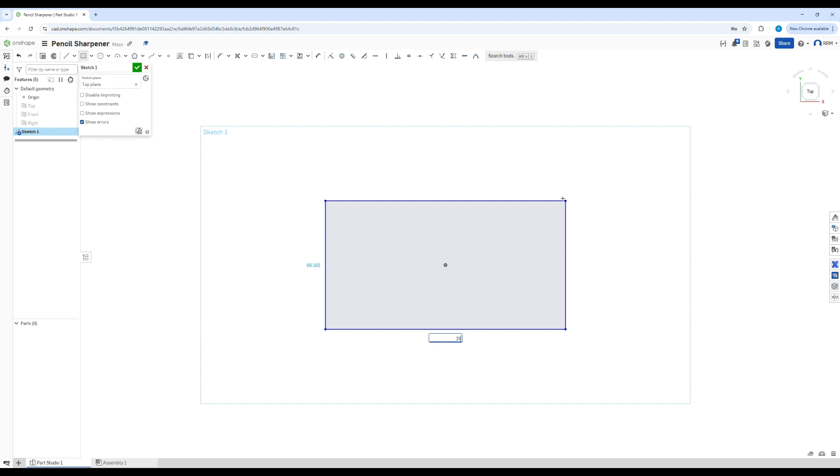So you're probably going to want to start on the top plane. Click for a new sketch, click N to go normal, P to hide the planes, and then you can get a center rectangle. Click and drag out, and we're going to make it 25 by 14, which is the rough size of the sharpener. You can then press Shift E to extrude it.

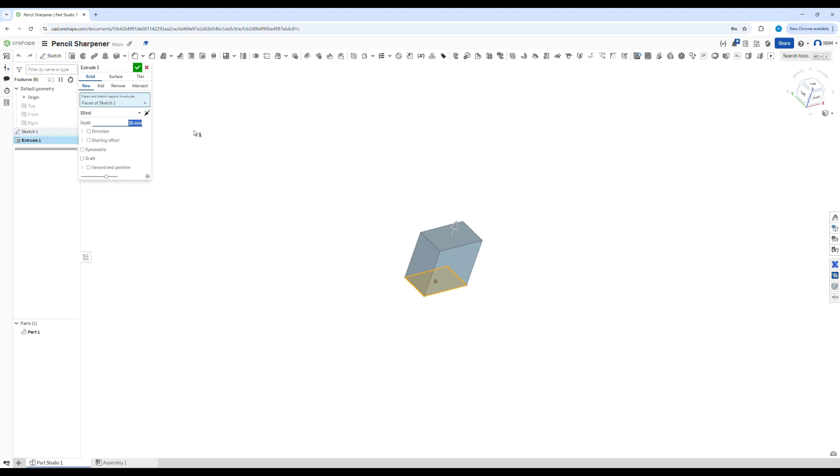I can drag it around with my right mouse button. The rough height of this pencil sharpener, I've actually got a ruler here, let me double check that. It is about 9 millimeters, like so.

If we make that symmetric, it's probably best practice, and then we can green tick that. So what we have is something perfectly centralized and cut through all of the planes, which is what we want to see.

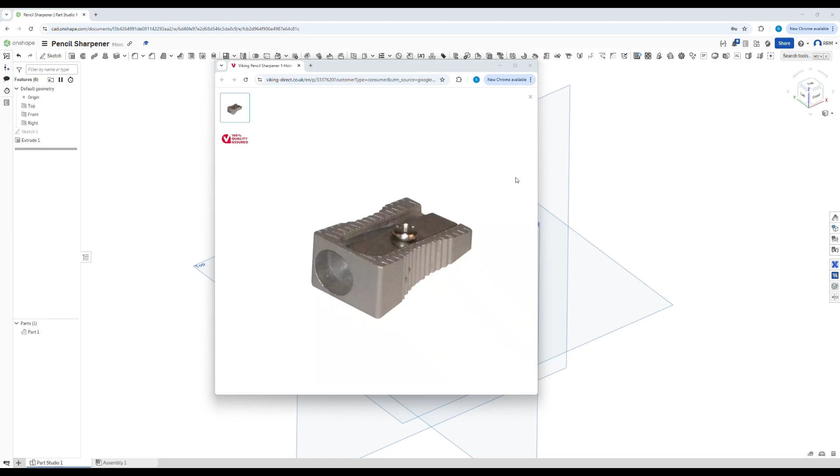The next step we could do is get that angle. So if we look at this angle, going from here down to here, this is about 9, and this is about 4 at the back.

So what I'm going to do is, on my front plane, because of how we've created it, click here, and I am going to go and sketch. So press S to get my sketch tool, click N to go normal, hide the planes to make it easier, and get my line tool by pressing L. I can just draw a random line like so, and now I can constrain it.

Click on this dot and click on this dot and press I for coincident, or you can go up here and get your coincident, and then we know this is going to line up with this end. I can click here and do exactly the same thing and press I.

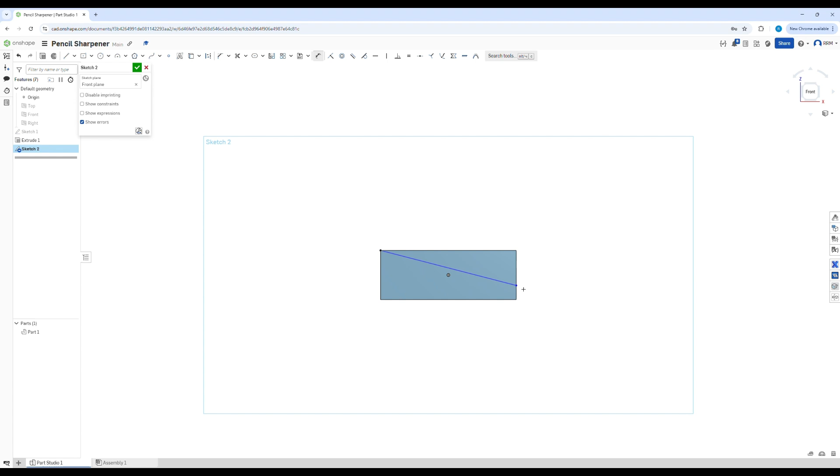Now this is blue still because it can move up and down. So if I get D for dimension, press this dot here, press this dot here, let's make that 4 millimeters. That is the start.

We want to extrude cut this main top section away, so I can press L and draw some lines, or I could use the project tool up here. I can click on this line, click on that line there, click on that line, we want to delete that dot, and now I can go and press Shift E.

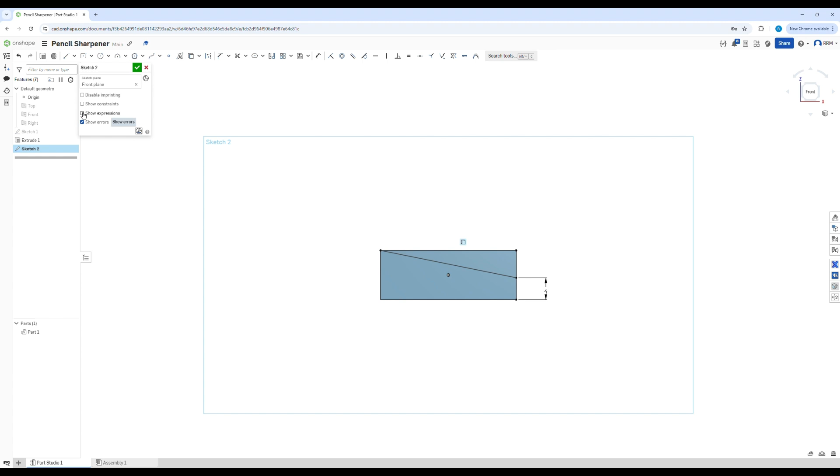It's going to automatically select that, change the direction by clicking on this arrow, and click on remove up here, and we're going to go through all, or I could have clicked up to face. Now it's going from the midpoint, so we're going to go symmetric, and it's going to take away all of that top piece there, like so.

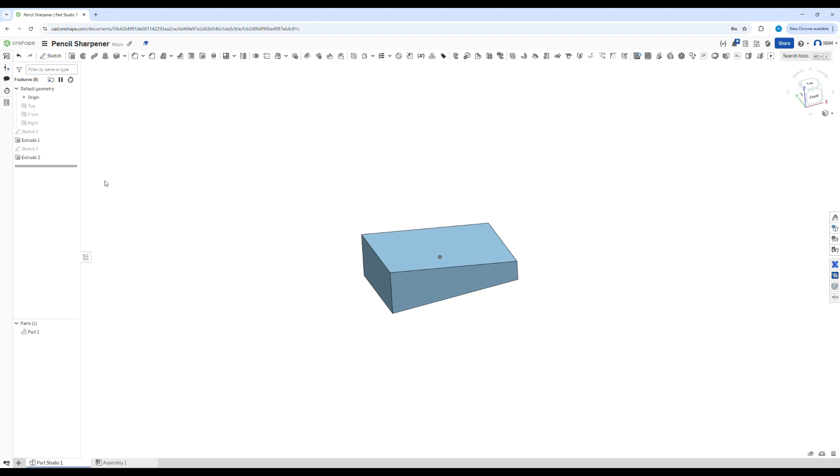Now the only problem with that is we have used basically a sketch and another sketch to create this part. There is, of course, a better way. So I'm going to click delete and show you. Let's get our plane back up.

What we can do: sketch on the right plane this time, press S, the shortcut key, get our sketch up, and then press N to go normal. We can start by drawing a line, like so.

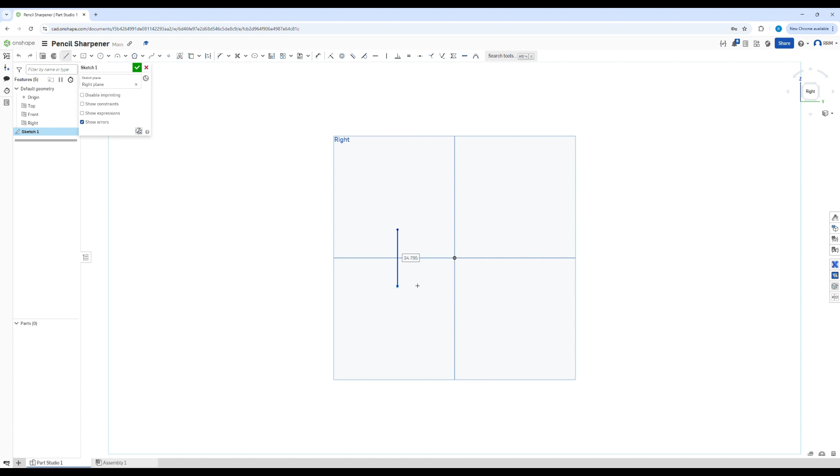Then we can draw another line back here, like so. Draw a line up and draw a line up. And hopefully you'll see the start of our shape.

Now we can click on here, and we could click on this point as well, and we could make that vertical. No, we're not, that's not what I want to do. I want to find... my point's not going to give it to me. We'll do that in a second.

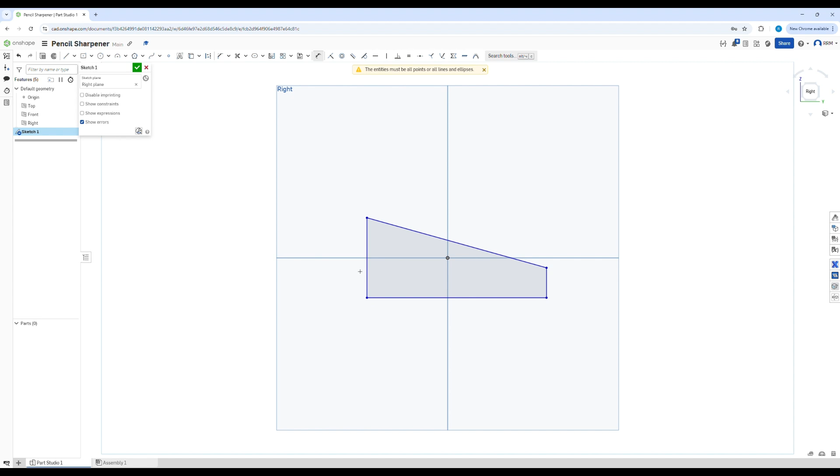So I can dimension this end piece to be 9 millimeters, like so, and I can measure this end piece here to be 4 millimeters, like so.

Now in terms of how long we wanted this to be, we said about 25, so that's 25 millimeters, and we want to try and constrain this somehow. For this moving up and down, halfway is going to be 4.5, and going halfway from back to front, 25 divided by 2 gives us 12.5.

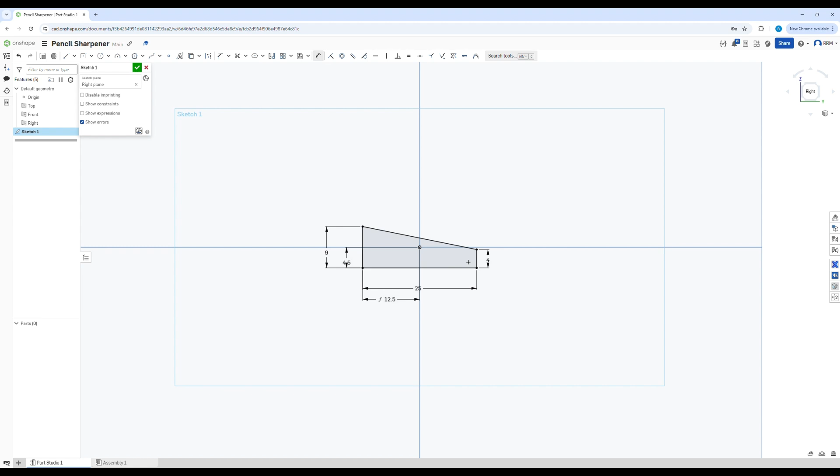So that is now nicely constrained in the middle of our planes. I can click on extrude, and we want this to be symmetric, so it goes 2 directions. In terms of the width of this pencil sharpener, it's about 10 millimeters, so I can click on 10 millimeters, and that is the total width of our piece.

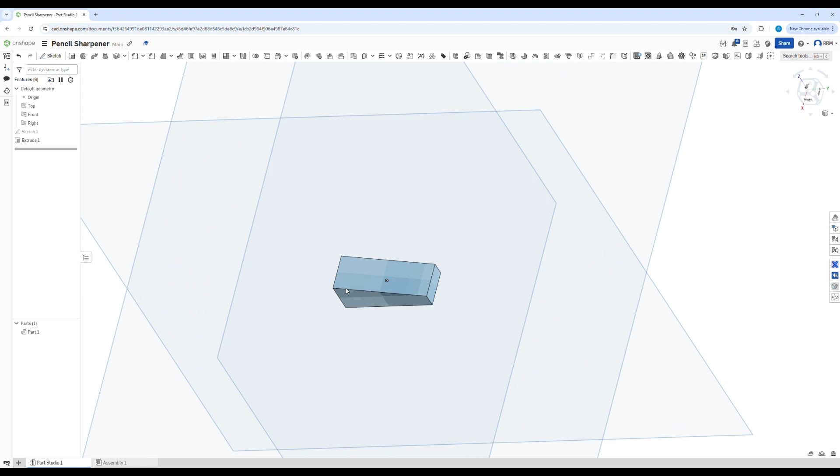As you can see there, we now have our pencil sharpener, and that looks much better in our model tree. Now the next thing we want to do is add these side parts. As you can see here, we've got this side cutout, so there's a few different ways I can do that.

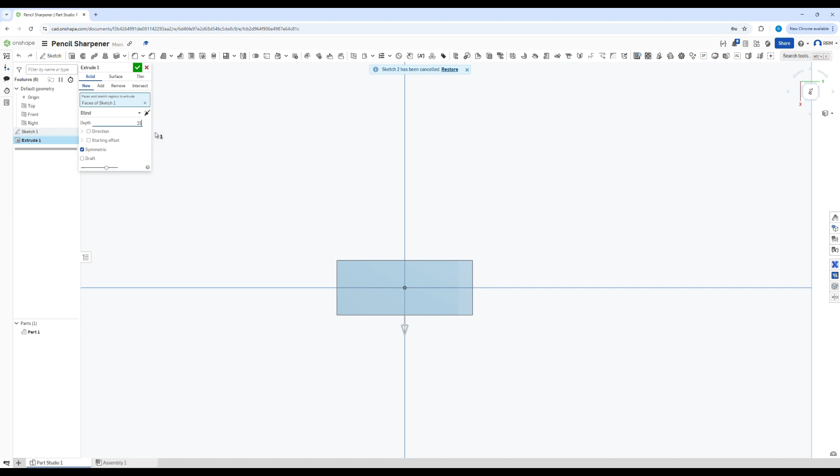I can go on my top plane, click S and sketch, then go normal to, and click P to get rid of the planes, and try and get these cutouts sorted. Let me go back a second - that was quite narrow, I think I should have gone for 15 millimeters, so we can edit that. That looks better.

Back in here, we're going to click on the top plane, click sketch, go normal to, hide our planes. We could use the circle tool, get this center point, drag up, get our circle, get a radius of, let's say 20, and then get a distance from the center point by clicking D for dimension, center point to this line here - let's say that's going to be 7 millimeters.

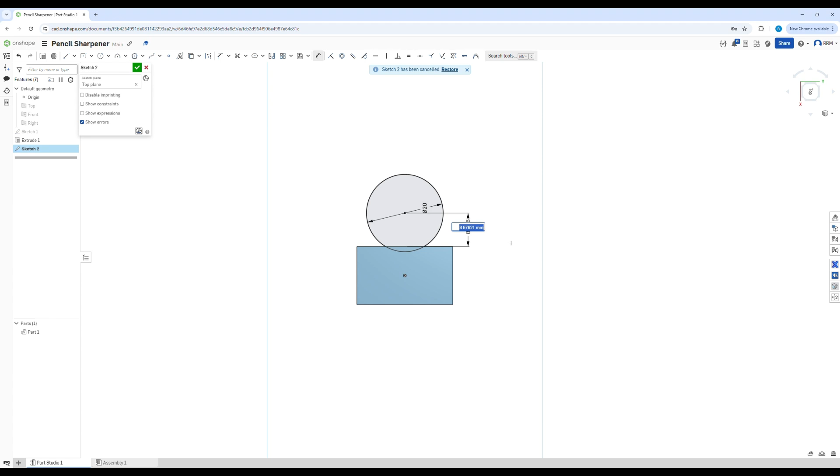And then we could shift E, extrude that away. We're going to click remove, and because it's in the center, we want it symmetric again, and we want it to go through all - so it does both sides, green tick, and that's quite good. But we don't have much control over that, so actually it's not the best method.

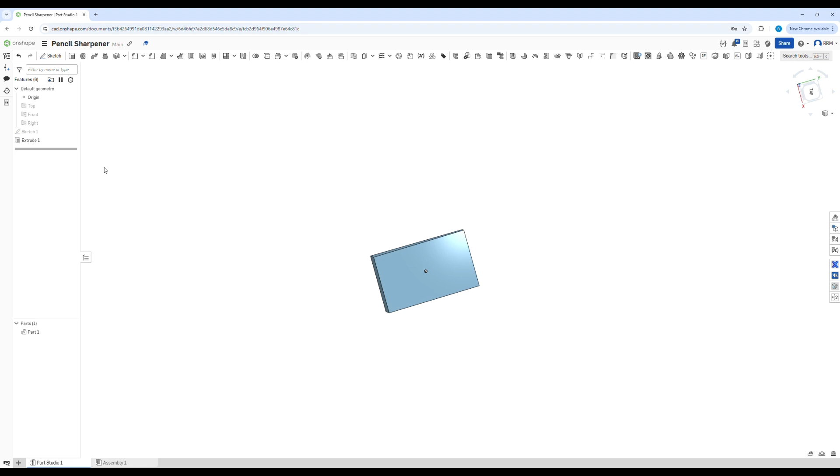We are instead going to get our planes back up by clicking P, click on the top plane, click S to sketch, grab our sketch there, go N for normal to, and this time we're going to choose one of our arcs. A 3-point arc will give us quite a lot of control, and we can randomly select this arc, and get a kind of token radius of 20. We can dimension this to be a certain distance from here, say 4 millimeters, and a certain distance from this end also 4 millimeters.

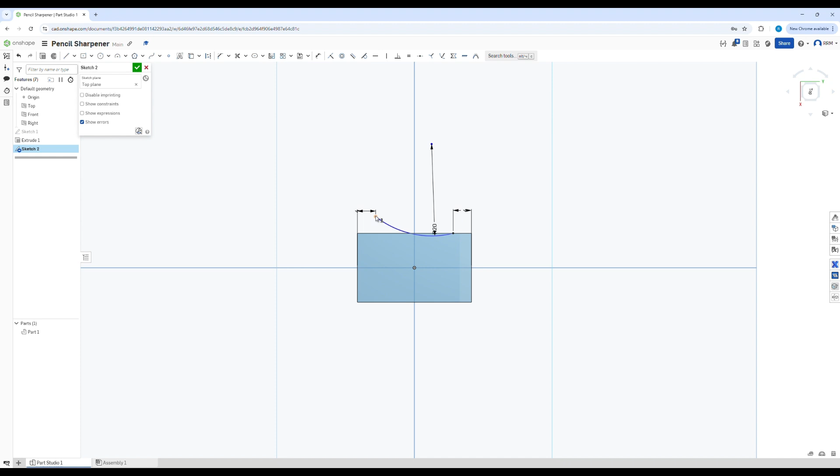Now it's kind of randomly floating about. We want this to connect to this line, so we can press I for coincident, and this dot here to connect here, press I for coincident, and that is now fully constrained. We could then just finish off with the L to get the line tool, connect these two up, gives us a solid shape, and we can click Shift E again.

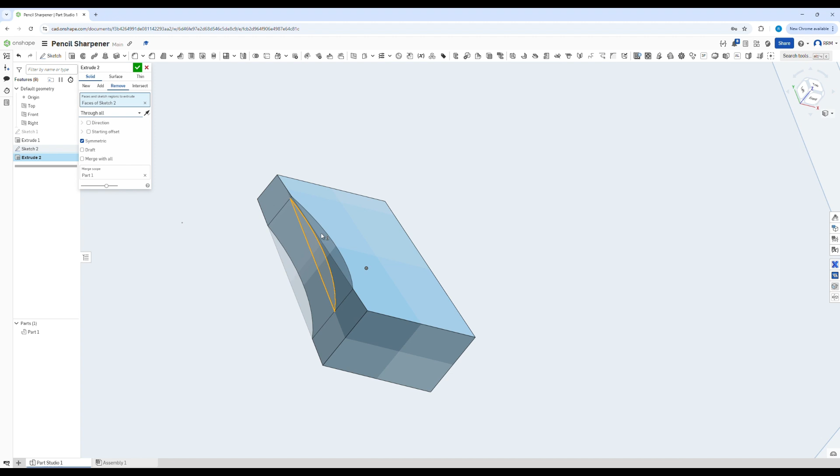That's going to get our extrude up. We're going to click remove, click symmetric, and click through all. And now we have that part like so. Okay, so that's quite good.

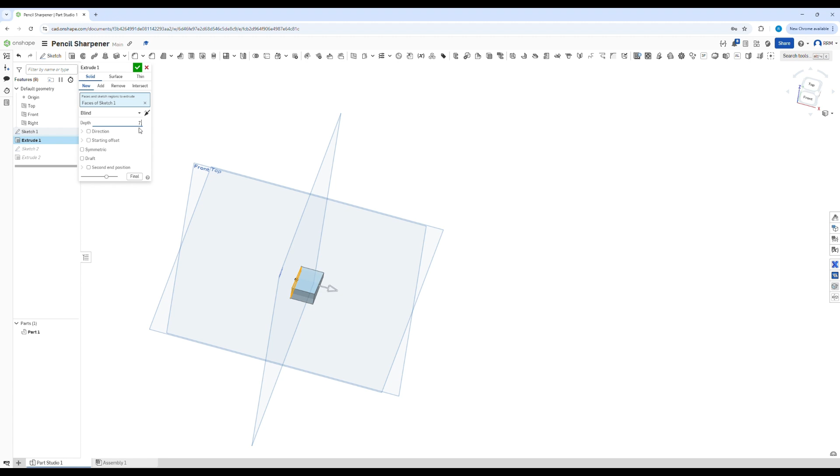We could have just built half of this shape if we wanted to. So if I go back to here, we could potentially not go symmetric and just go - 14.5, what am I saying - 7.5, like so. Green tick that, and you can see it's gone the wrong way.

So if I do this, go in that direction, it's now hiding my feature because of how I have made it. So that's actually not going to work.

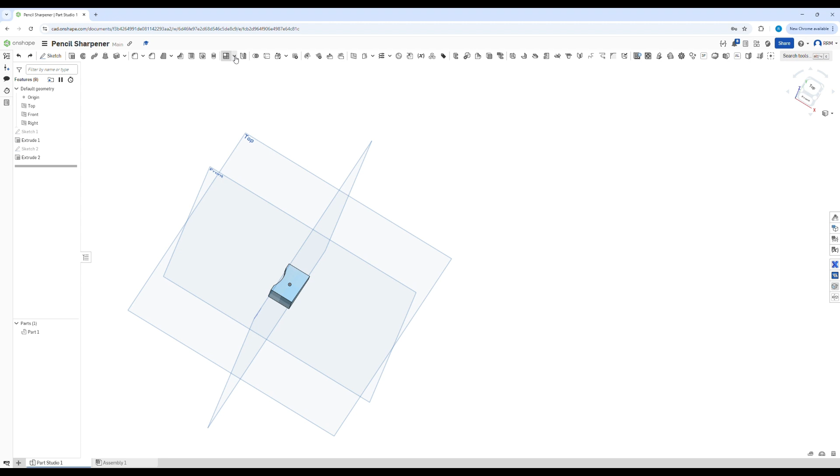What I was originally going to do was mirror this part. So I go up and grab the mirror tool, entities to mirror. We're not going to do a part mirror, we're going to do a feature mirror, and we want to mirror this extrude. So we grab our mirror plane, which is going to be this right plane that cuts straight down. Click on the right plane, reapply the features, and now we have our little cutouts. That looks more like our pencil sharpener.

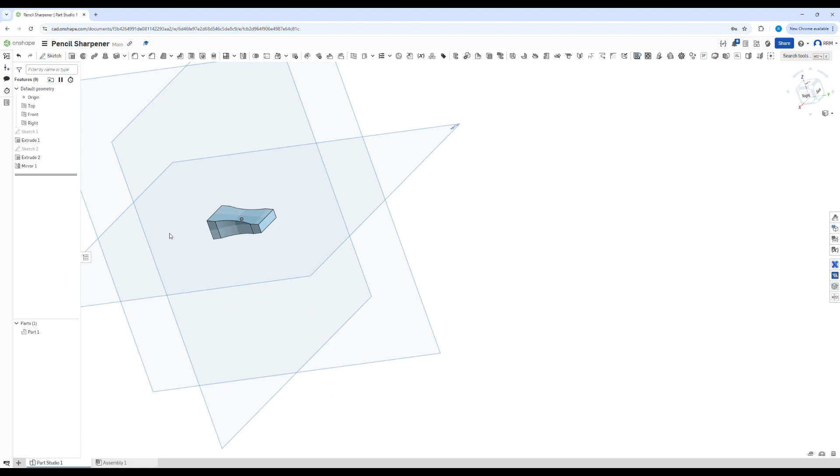So not a huge feature tree, it's looking pretty good so far. The next thing is to get the circular part. This circular part cuts all the way through. Let's have a look at how we could do that.

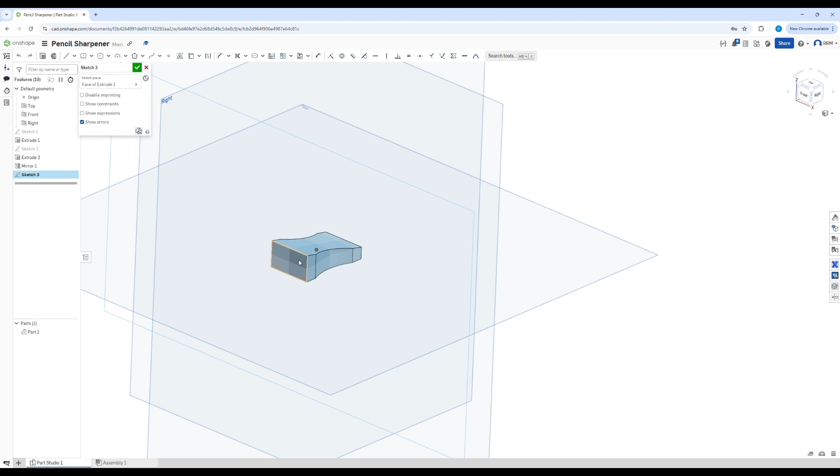So we can click on here, press S to get the shortcut up, and click on sketch. We can then go normal to because we're clicking on this face. So N for normal to, C for circle, and then we can use our circle here. Let's make this circle roughly 8 millimeters. That looks quite big. Click on this dot. We want to find this center point here, so we use that point, and get H for horizontal, so it brings it up to halfway.

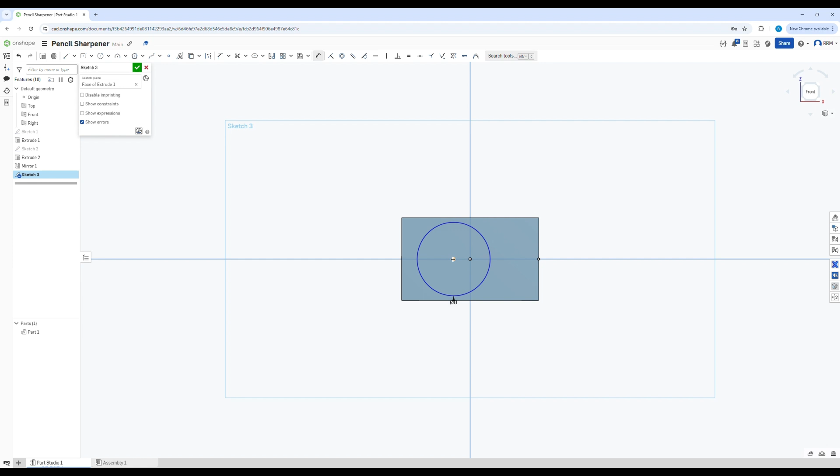This can be dragged across, which is not what we want. So we get our dimension tool, and go from that origin in the middle, and let's say it's going to be, I don't know, 2 millimeters, like so. Green tick that, and we have a sketch on a face.

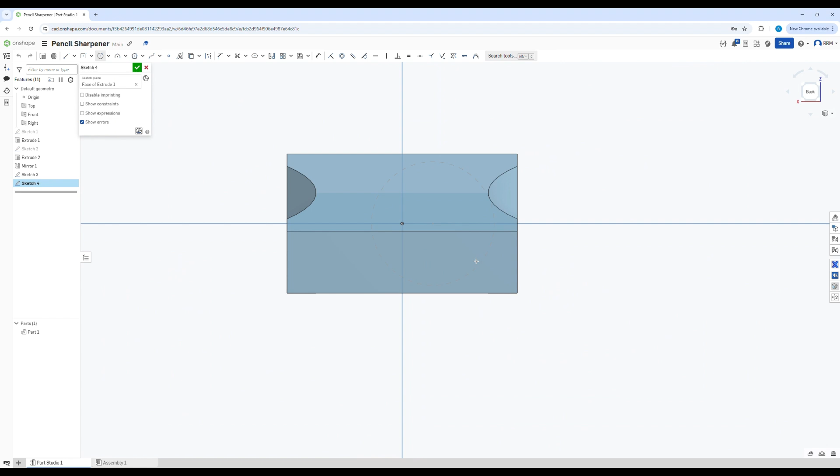We can then do the same on the other side. So S, once I've selected the face, click on sketch, it automatically chooses that. Then I go N for normal to. I get my circle tool by pressing C. I click and get a random circle. Let's make it, I don't know, 3 millimeters.

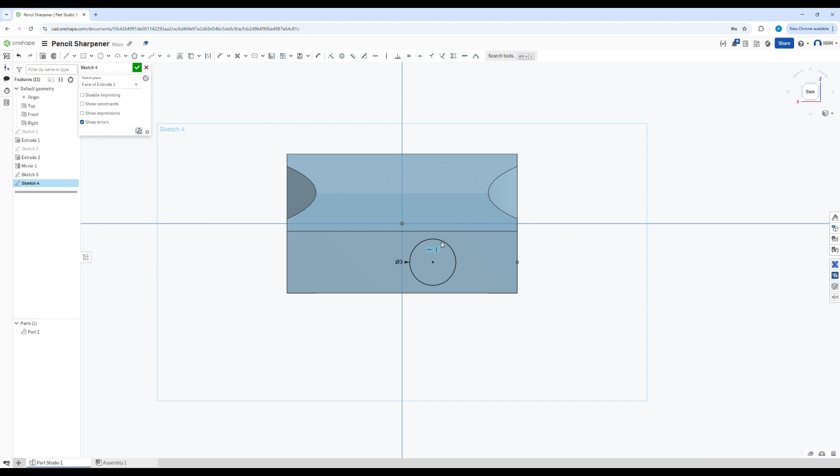Again, we can go from this point to halfway along here, which will make it horizontal, and therefore in the middle of this point and this point. And then I'm going to line this one up with the dot from my circle in the distance. I can go V for vertical, and now that is fully constrained. So I've got 2 circles.

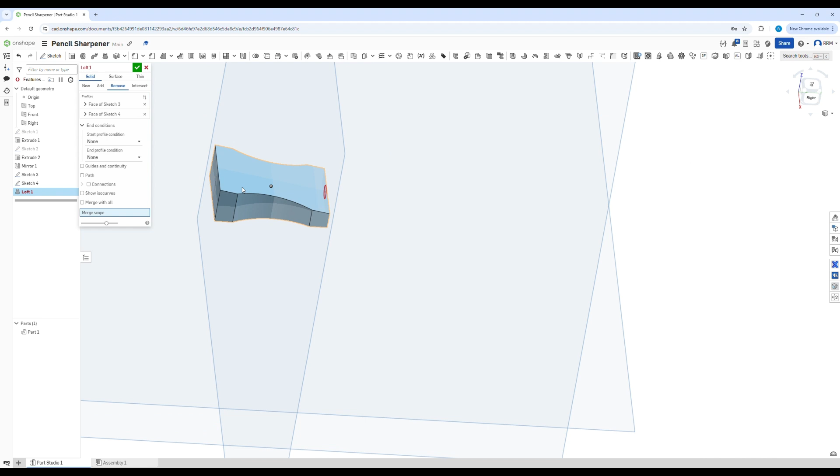I want to cut between them. What I can use is the loft tool up here. I can select this first profile, and I can select this end profile, and it doesn't like that. Okay, that's because we're using new. We want to choose the remove surface, the remove solid feature. And we're going to merge it with this. What is going on? That's started our first piece.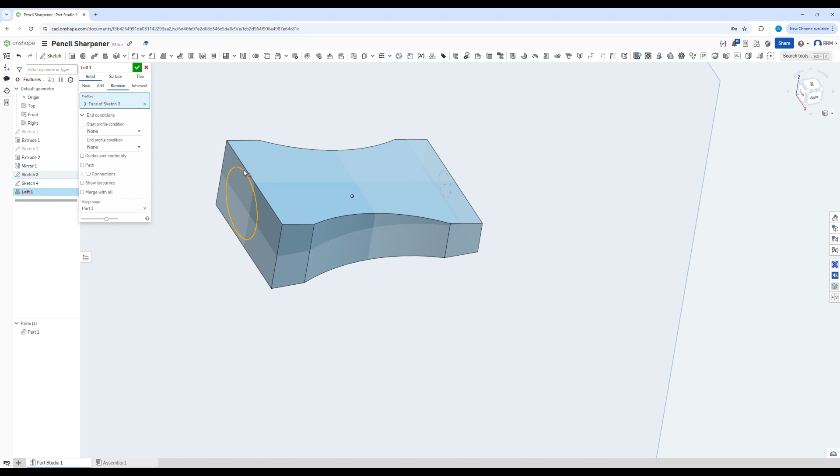Hang on a minute, and then we want, no, we don't want that. It's chosen the faces, it's not chosen the actual circle, so you've got to be careful. That's the face again. We need that part, and we need that part. There we go. So make sure you choose the actual face of the circular part. And as you can see, that's gone all the way through, which is good.

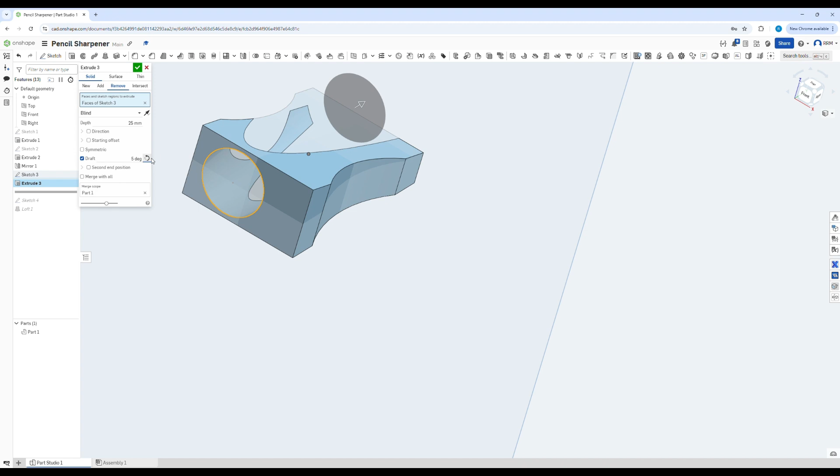If I just go back before there, some people would potentially be thinking, okay, we've got a sketch on there. We can extrude that sketch back and remove it. And you could potentially add a draft of, say, 5 degrees. But if we go in the opposite direction, you could see how that might work. Even if we made it a bit more, it starts cutting it down a bit more. But you don't really have much control over that, okay? So that wouldn't be a very good method. You see how it's kind of pretty random.

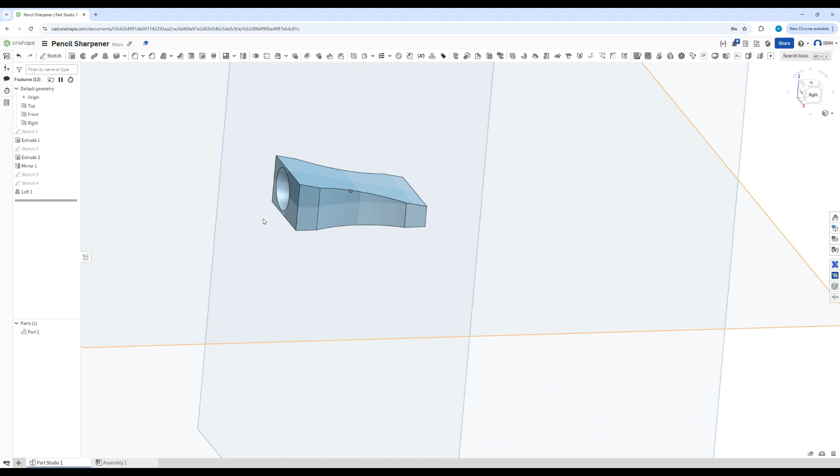So we're going to take that out, delete that, and roll this back. So we've got a pencil sharpener. That's looking pretty good. Hide those planes there. We are happy with that. Now, of course, you can then go in and start cutting more parts away.